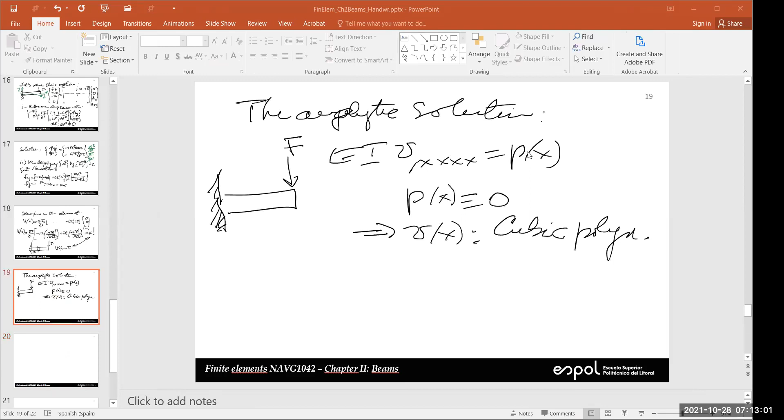Okay, so let's see if we can do this. So today is October 28th. Let me write here just to check after the quiz number 1.

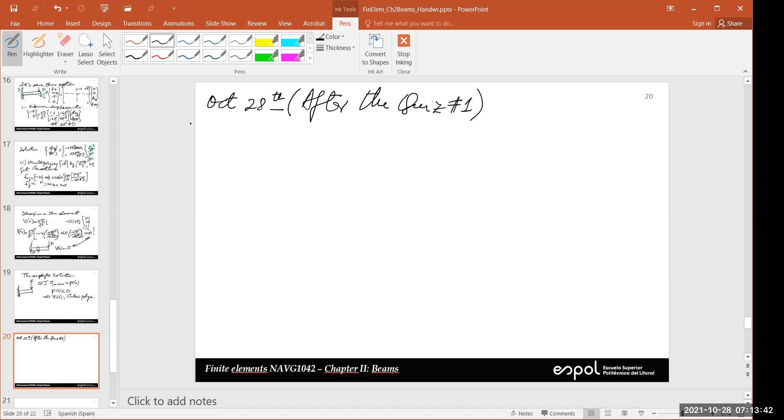Okay, so anybody, how do you remember the errors, the problems that we had in the source code that I gave you? Does anybody remember the errors? Anybody?

Anybody remember any of the problems in the code? Anybody? Yes, doctor. I have two errors, a syntax error in the bracket in print, okay, and in the table list. So there were some missing characters.

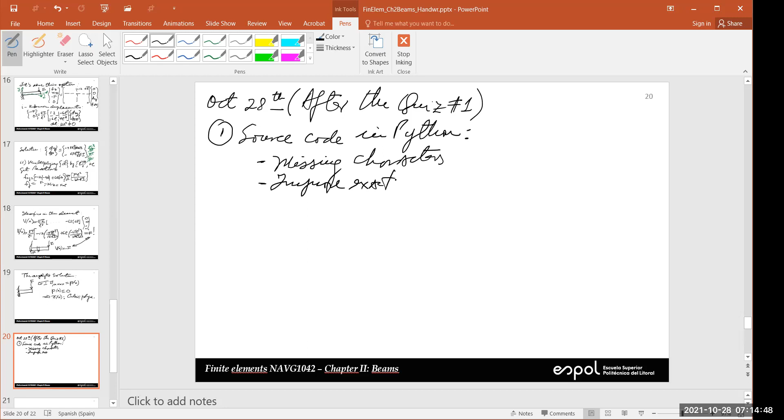Okay, the second one was about how can you improve the exactness of the calculations. Anybody? Anybody, please? How can you improve the exactness of the calculation?

Anybody, please? Anybody? Mr. Ortega, what did you answer in this question? Mr. Ortega, are you there? Yeah. What did you answer for this? You didn't answer this? No? Would you please raise your hand if you answered this question?

Okay, there is somebody who had problems. Mr. Ortega had internet problems. Anybody else? Did anybody answer this question, please? Yes, no? Ms. Vera, did you answer this question?

Good morning, doctor. Yes, I answered, but I think I didn't make it right. Okay, sorry. No problem, no problem, you don't need to say sorry. The thing is, you were trying to find, oh man, what did I do? Okay.

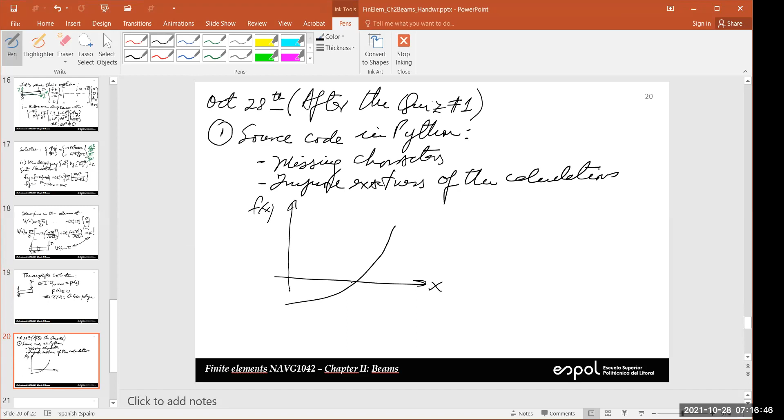Basically, what you're trying to do is this: let's suppose that you have x and this is f of x. So you're trying to find the solution for that. That's the value that you're trying to find, so let's call it x star.

So what you do is you say, if you start with one approximation, for example, you start here, okay, this is your xi, this is your ith approximation. So you subtract from this the function evaluated at that point, and you divide it by the derivative of that at that point. And then what you do is you calculate the error.

The error is the absolute value of the difference. So what we have to do is take this difference and try to make it less than the tolerance or the maximum error. If this is correct, then you stop. If not, you have to go again and try it again.

So there was a variable or a parameter we call tolerance, and we set this value equal to 10 to the minus 4, I think. Genesis, do you remember this value? Was it 10 to the minus 4?

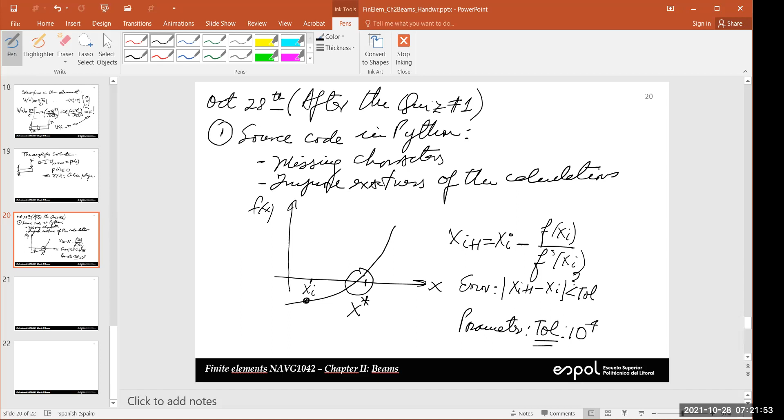But you can set the difference equal to a value smaller than this one. And if this is small enough, this difference eventually becomes negligible. Okay, that's all we can do, because these are real variables. I don't know if I answered your concern.

Who's this, please? Dr. Ordóñez. Okay.

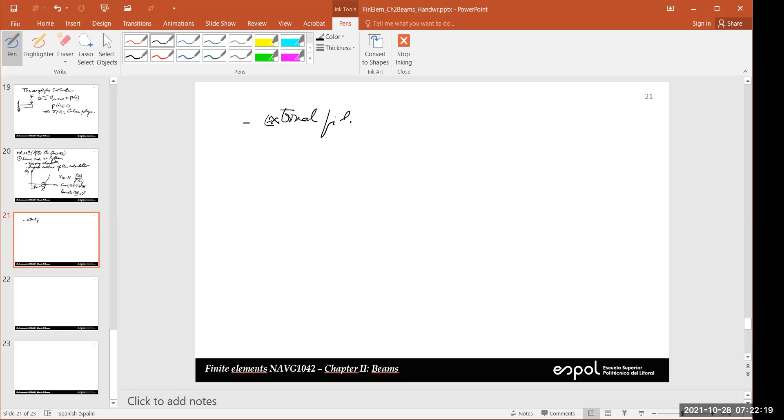Okay, and the last question about this was how can we put this information in an external file? External file for results. Mr. Mateo, are you there? Mr. Mateo? Yes, doctor. Did you answer this question?

No, doctor. Okay, could you please turn on your cameras if possible? Because I have very short memory, so I know I said hello yesterday, but it's difficult for me to remember each one of your faces. So please, would you turn on your cameras if possible? In some cases, I understand there are some problems because of the connections. But if you can, please turn on your cameras. Okay, now I cannot see you for some reason.

Okay, again, did anybody answer this part of the question? Mr. Carrillo, did you answer this question? No, doctor. No? How did you do the homework? In the homework, you had to do this part. You have to put your results in an external file. Homework 2? No, homework 1. Homework 1, external file, and I can find the program. Yeah. In homework 1, you had to do this, right? You have to open a file and then write in this file. How did you do it?

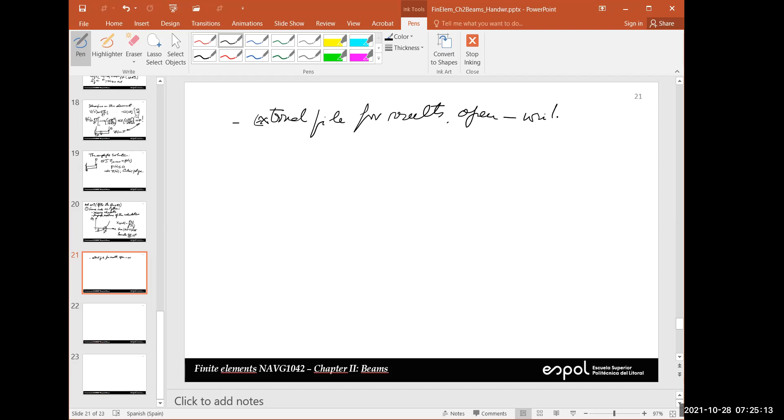I'm really worried about that, because if you didn't do this, but you completed the homework, what can you conclude? I don't remember homework one, doctor, sorry. No, no, come on. Mr. Nevares, you were going to say something? Yeah, I don't remember needing that code in homework 1, so I didn't do it correctly during the test. Okay, Jimenez, were you going to say something? Yes, doctor. Just write 3 lines of code to open the file, write on the file, and close. I remember that. More or less, that's the idea.

Good. Okay, the second one was aligned bars. This part of the question was just a way for me to check if you did the homework. I'm really worried, because this is something that you had to do in the homework. If you didn't, please put yourself in my shoes. What I have to think is that you're copying the homework. That's exactly what you had to do in the homework. If you didn't do it, that means that you're copying the homework, and that's something that we don't like.

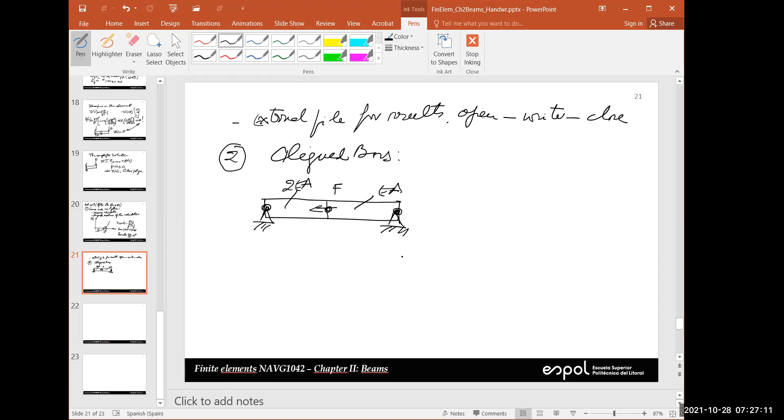Mr. Zamora, how many elements did you use to solve this? How many elements? 2 elements, yes. So we have 1 joint, 2 joints, 3 joints. Okay. How many degrees of freedom do we have in this case, Mr. Zamora? Just 1, I think. Now, in general, you have 3, okay?

But what I think you're saying is something like this. So this is D1X, D2X, D3X. See, we have to solve this because all the bars are aligned. And then on the right-hand side, we have F1X, minus F because it points to the left, and F3X. And here, this is 0, this is 0. So basically, what you're saying, Mr. Zamora, is that you have only 1 displacement to solve for. So this is your K22.

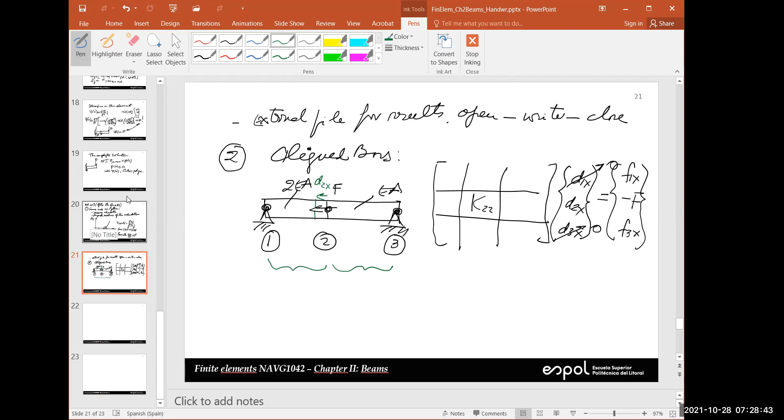Okay? And then, if this point supports a force to the left, what happens with this part here? And what happens with this part here? If this section, because of this force, moves to the left, this is what we're going to obtain for D2X. So D2X has to be a negative value, definitely. If the central section moves to the left, this part of the bar is going to be in tension or in compression, Mr. Iñiguez?

In compression. Yes, in compression. And this part here has to be in tension. So if you calculate P for this one, this value has to be negative. If you calculate P, that's the internal force, for element 2, this has to be positive.

Is there any way you can check this result, people? If I give you P for the first and for the second element, is there any way you can check these values to be correct or not? Anybody? If I add them up, they have to have the value of F. Yes. So if I add P of 1 and P of 2, absolute values, they have to be F. Yeah.

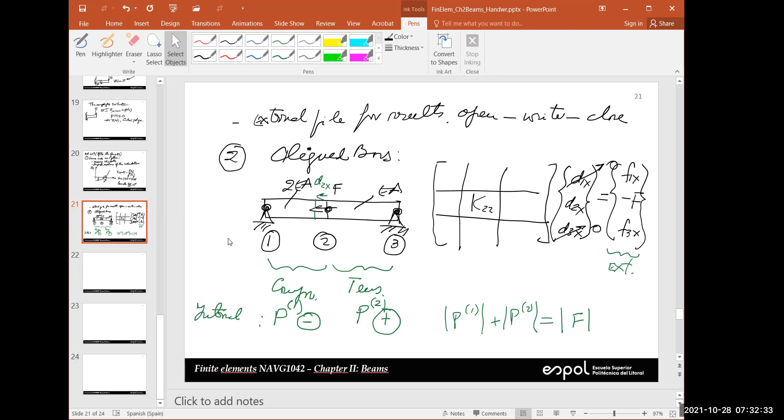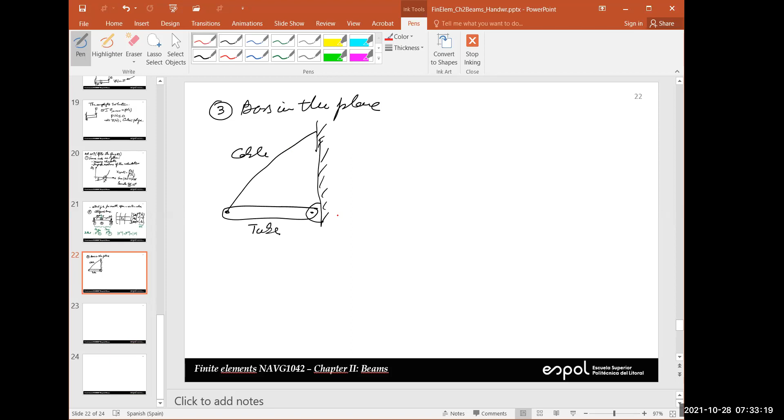Okay. Next problem, it was bars in the plane. It was something like this. There, and you have a cable. Okay, so this is a cable. This is a tube. Now we need to start with a global reference system. See, this is something that we have done. This is our global reference system.

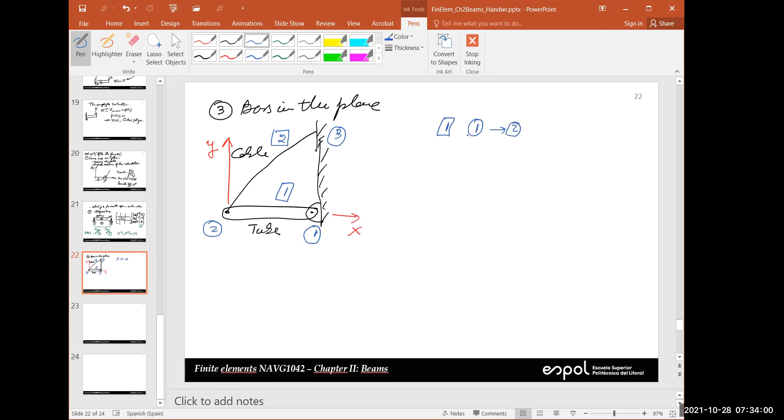Of course, we have 3 joints. Let's call this joint 1, this joint 2, and joint 3. Okay, so let's call this element 1, and this is element 2. Okay, so let's put here our table of connectivity. Let's suppose that I go from 1 to 2 for element 1. And for element 2, I go from joint 2 to joint 3.

Okay, let me ask you something. Miss Lopez, what would be your theta for the first element? What's going to be theta for the first element? 0. 0 is, do you agree with that, Mr. Zambrano? Mr. Zambrano, do you agree with that? You see that minus what? See, if I go from here... 180, doctor, I'm sorry. Yes. So that's your X and your Y is pointing downwards. So this is your theta, and that's going to be 180, yes.

And for theta 2, if I go from here to there, let's use a different color, let's use green. So this is going to be local X, this is going to be local Y. Of course, I'm not going to write it there. I don't know, maybe about 50 or something, right?

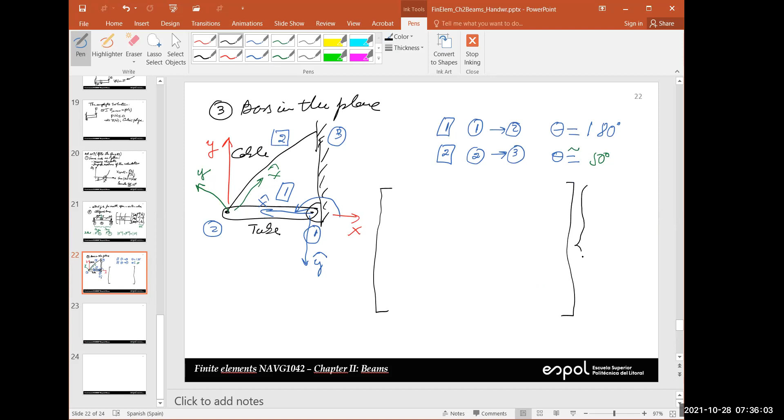Okay, now, how many degrees of freedom do we have in this case? Mr. Zambrano, how many degrees of freedom do we have in this case? Our big K matrix, how big is it going to be? The big K. Mr. Zambrano, are you there? No? Let's go on. Somebody's not here. Let's go down.

Mr. Ruiz, Mr. Ruiz, how many degrees of freedom do we have for this problem? Okay, I'm asking you how many rows and how many columns this matrix is going to have. The big K, how many? No, please, let me ask somebody because I need to. No problem. But Mr. Ruiz, do you know how many rows and columns this matrix is going to have? Mr. Ruiz? 6. Yes, it's going to be 6 by 6, yes.

6 by 6. Okay, now, the problem states that this point here moves once you apply the force, whatever force this is, it says that this point moves downwards. So in this case, d2y is something that we know. Let's call it big D2y. So this is something that we know. Okay, the vertical component moves downward like that. Of course, this and that don't move. So we have something like this. This is 0, this is 0.

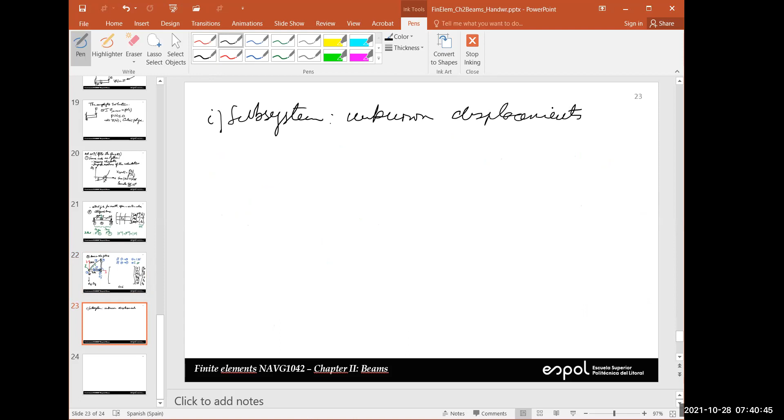So the next step is to solve this problem, and to solve it, we go to the first subsystem. And in this case, we try to solve for the unknown displacements. But there is only one. So we're going to solve for K33 times d2x, and it is equal to, I'm sorry. There is an error here.

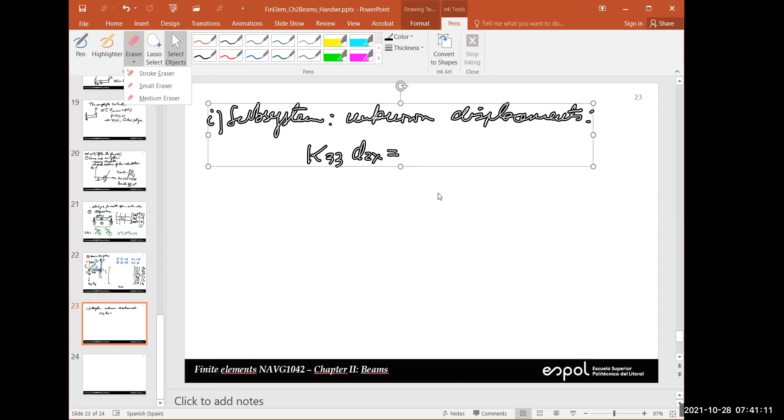So this is d2x, and then we have to add K34 times D2y, and this number, we know it, and on the right-hand side, this is equal to 0. That's the only equation that we need to solve. Okay, so this is known. K33 and K34 you need to calculate, and this is the unknown.

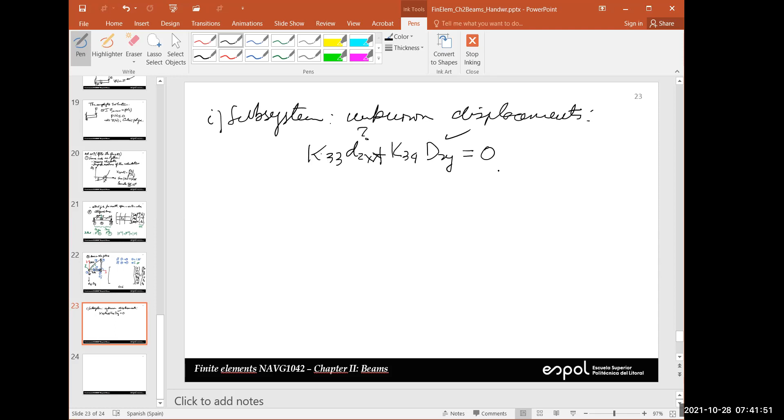So at the end, if this is the system that you need to solve, okay, I'm going to write it with this color. So we know that this value will come downwards, and this is d2y. This is data. Yes, you move downwards. And then from here, I can calculate d2x, okay?

So d2x, what's going to be the sign? What's going to be the sign of d2x, people? Tell me, anybody, the sign of d2x. Positive or negative? Minus, negative. So you think this moves to the left? Positive. Yeah, I think it moves to the right. It's going to be very small, probably. But let's suppose it moves to the right.

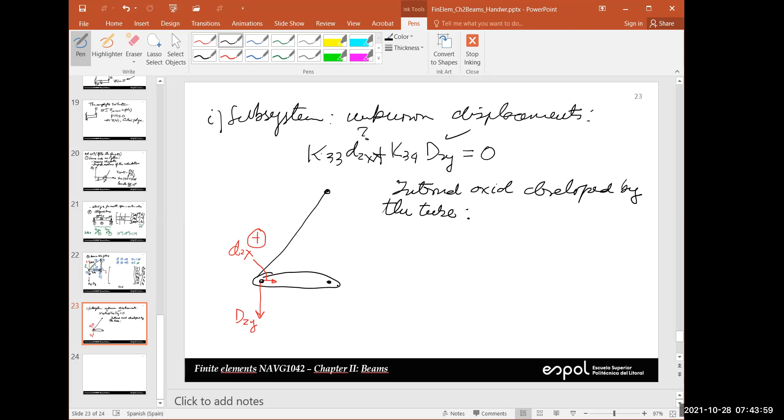So this is going to be d2x that you calculate using this equation. So in general, I would expect this to be positive. Okay, let's assume that this is positive. Now the question asks you to calculate the internal force which is developed by the tube. How do you calculate that, Mr. Jimenez? First we get the reaction. But what for? It's in the point 1. Yeah, you can do it, but in that case, you will need to calculate this and calculate that.

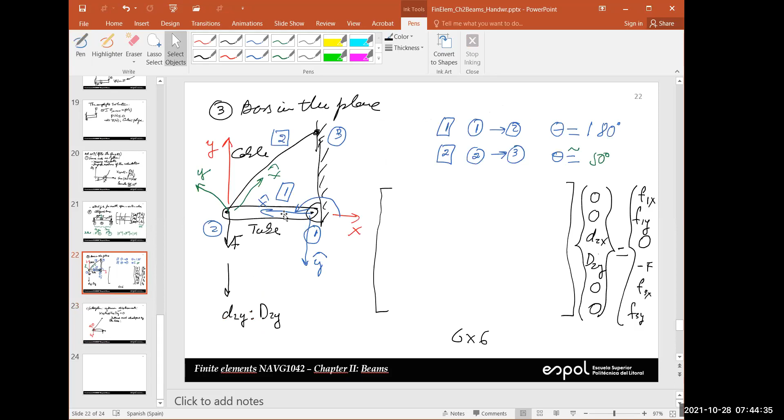Anybody else? Any other idea? How to calculate P here? We need to go over to the local reference. Exactly. Now, if this moves to the right, what's going to be the local x-axis for this? Don't multiply. Let me go back. Okay, this is your local reference system. Theta is 180. Yes, I know. But if this is your local reference system, how much is going to be the displacement of the second joint?

Let me repeat here. For this element, this is the local reference system and points downward. Remember, this element 1 goes from 1 to 2, okay? So this is the second joint of this element. Let me write it here: second joint of first element. So we're saying that this moves to the right. But in our local system, d2x is going to be positive or negative? That's a good question for you. Negative.

Who said that, please? Your name? That's correct. Ruiz, doctor. Yes, Mr. Ruiz, you're right. So you see, this is the positive x direction, and this point moves to the right. So this is negative.

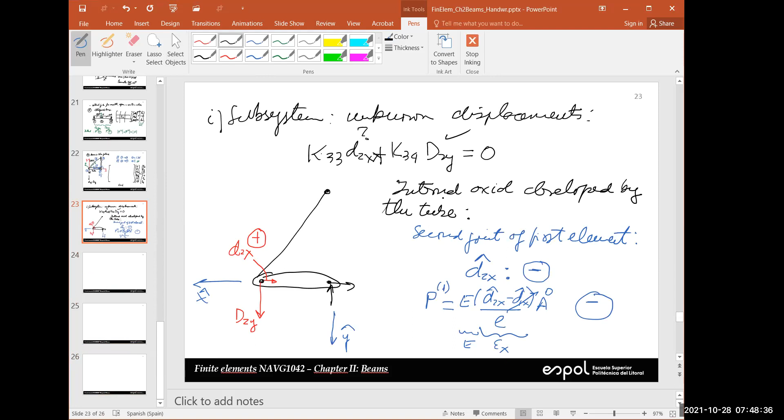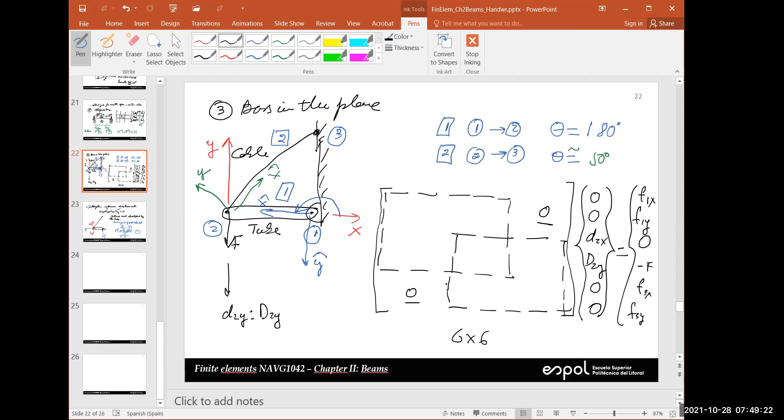See, I didn't ask to write all this matrix because it takes a lot of time. If you start writing 36 values here, that's the first element, that's the second element, you start calculating each one of these values. That takes you probably half an hour. But that's a waste of time because you don't need all of this. But you need to recognize that after you do the homework. That's my concern. Okay, let me go to the last question.

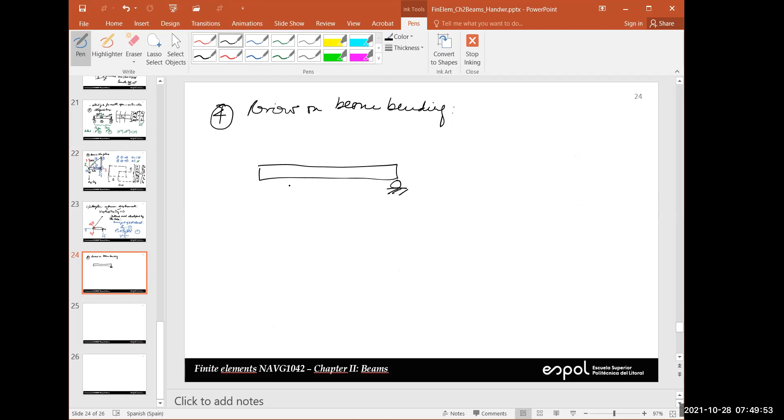Okay. It's a review on beam bending. Okay, so this is a typical analysis, and we have analyzed this in structures, I'm sure. So you apply two forces here and here, and this is symmetric.

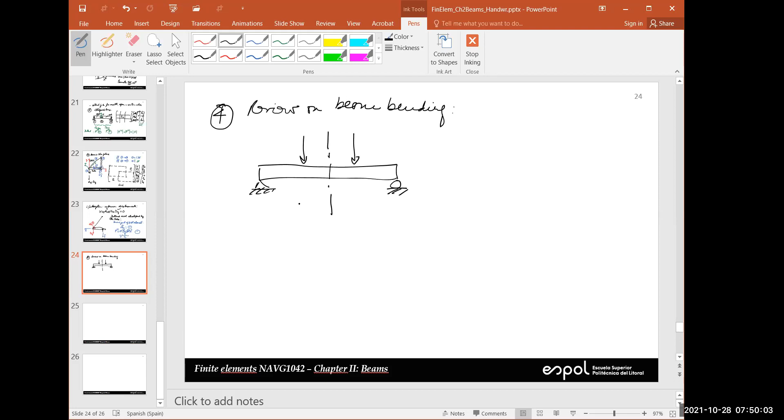Okay, so in this case, if you apply a force here and another one here, this is symmetric, the reaction has to be here equal to F. The reaction is going to be here equal to F. So if I write shear force in this part here, Mr. Barba, in this area here, if I make a cut here, the shear force here is going to be positive or negative, Mr. Barba?

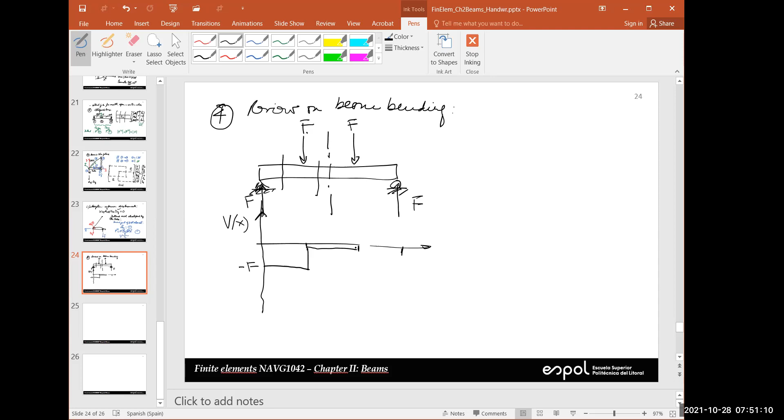Shear force. It's negative. Negative, yes, because this is a positive face, and since the force points upward, here you need a force pointing downwards, which in our convention is negative. So this is minus F. So in this region, if I make a cut here, I have the two F's, they cancel. So here you don't need shear force. And in this part, you go again to that. So in this area, you have no shear force.

If I plot the bending moment, the shear force is constant. Remember, the shear force is the opposite of the slope of the bending moment. dM/dx is equal to what? Minus V. So in this part of the beam, you have a constant negative shear force. So this is equal to plus F. So that means that this bending moment has a positive slope, and it starts in 0 because this is simply supported. So we go like this.

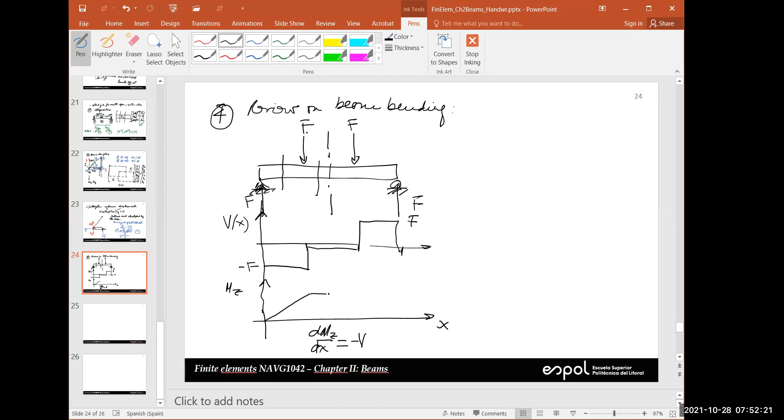In this area, the slope, the shear force is 0. So that means that this is constant. And here is the opposite. So we go back to 0. Okay, if this is F, how much is this bending moment? Mr. Iñiguez, how much is this bending moment? We need the distance here. I'm sorry. This is data. This was data from here to here.

I think we put a distance here. And we have a total length of whatever. So how much is this distance, Mr. Iñiguez? Sorry, doctor, I don't get it. This. See, I have L, that's the total length of the beam. A is the distance between the two forces. So if I subtract L minus A, I have the combination of this plus that. So since this is symmetric, this has to be equal to half of the difference.

So let's go back to our bending moment. How much is going to be the bending moment? Miss Cumbe, let me go back. No, Miss Vera, it's your turn. Miss Vera, how much is going to be this bending moment in this central region of the beam? F times L minus A over 2. Yes, yes. So that's the bending moment.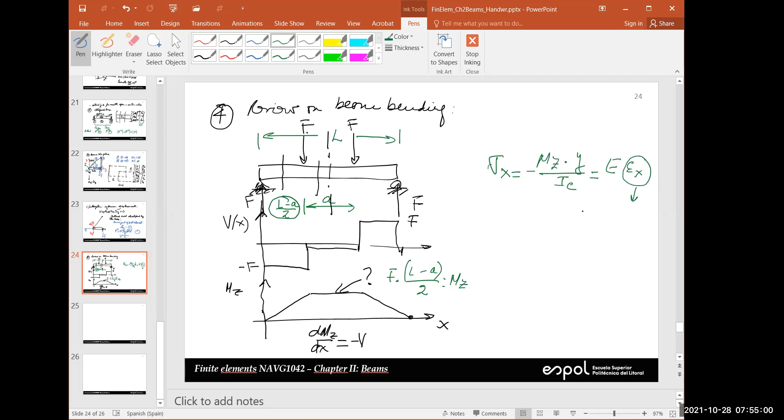Now, sigma is equal to what? Minus bending moment times distance over inertia. Yes. And this is equal to what? This is equal to E times epsilon x. This is something that we know. Okay, this is what we measure using a strain gauge. So we know this value. It's very small, say 10 to the minus 6, but in our lab, since we measured microstrain, the value was very large for our standards. And from here, this is what we need to calculate this.

We can define inertia divided by Y max. And from here, this is something that we know. So we can calculate E. Okay, this is very simple. You can see in the literature, this is a test that people do in order to get the E value when you don't have a universal testing machine, because it's very simple, very easy.

And in the central part here, you have no influence of shear. Okay, so here you have only normal stresses in the central part. That's why we say that there is only sigma x. We don't have to worry about any other type of stresses in this area.